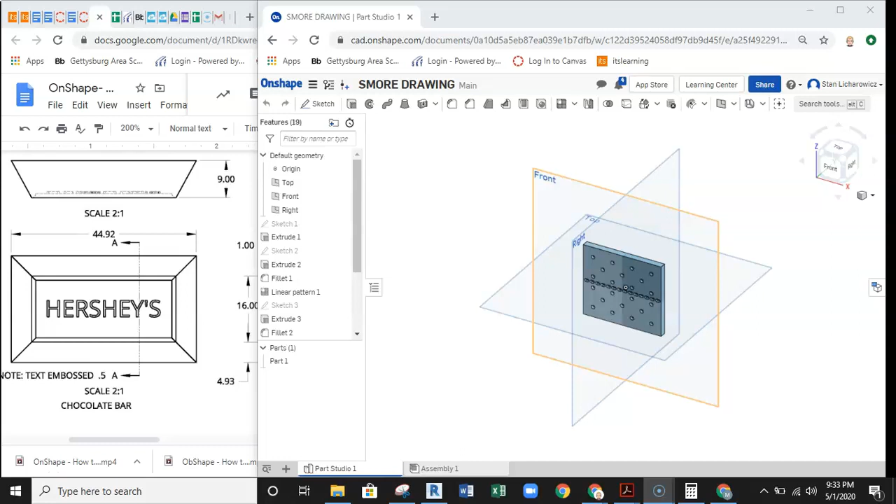This video is going to be sort of part two of the s'more working drawing file we're working on, and we're going to go ahead and model this Hershey bar here today, this chocolate bar. We'll go ahead and start by setting up a new sketch plane that will become a new part in the OnShape s'more drawing file.

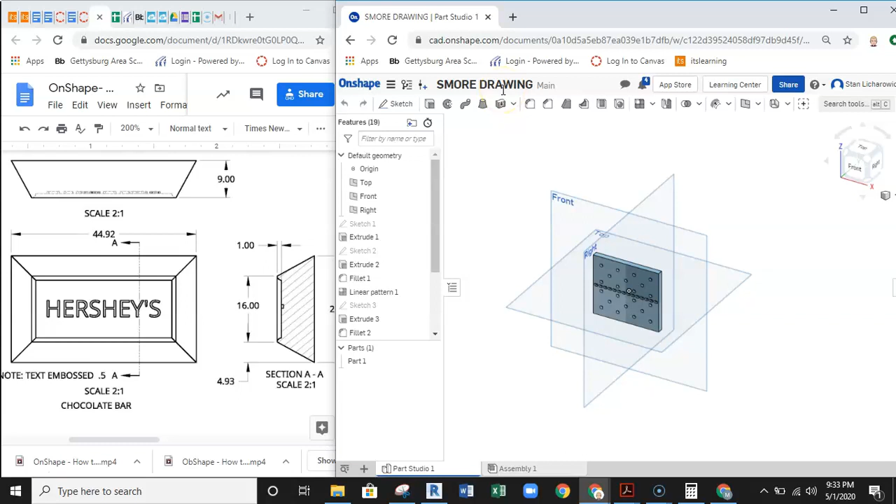So what we'll do is grab our sketch tool. It really doesn't make a whole lot of difference what window or plane we work in, but I do want to set this up so it's logical to me. So with the top plane selected, we're going to take a look at this.

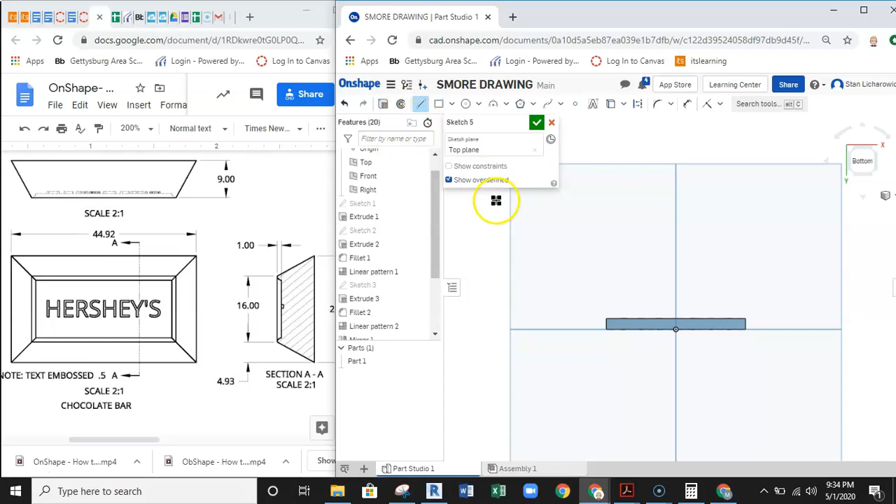Going to go ahead and grab some sketch geometry, grab my line tool, and sketch this in. Let me scoot this window a little bit so you can see, push this over. I'm going to sketch in this right side section view profile, and I'm not going to get the profile of this indentation yet - we'll do that later with an extrusion. I just really want to work out the profile of this entire part.

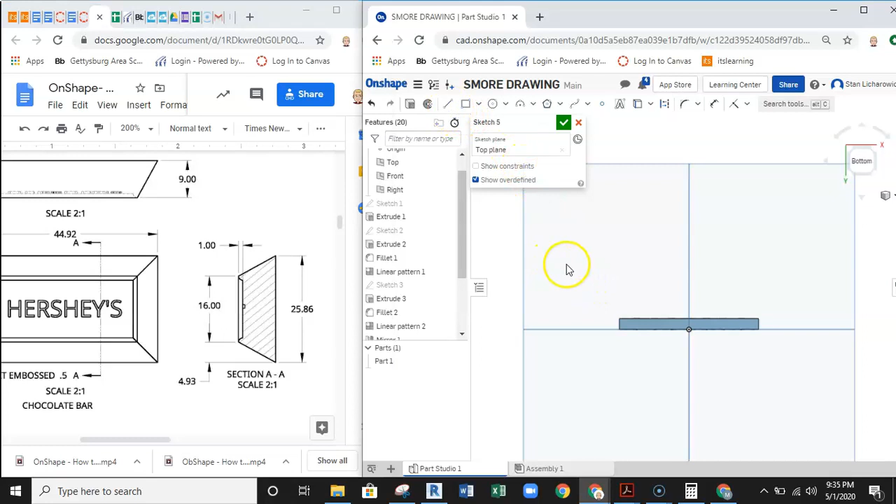I'm going to use the dimensions given in the top view for the extrusion information and the depth information. So we're going to grab my line tool and just sketch in a line. I've really gotten used to trying to sketch things in first and then start dimensioning them for size.

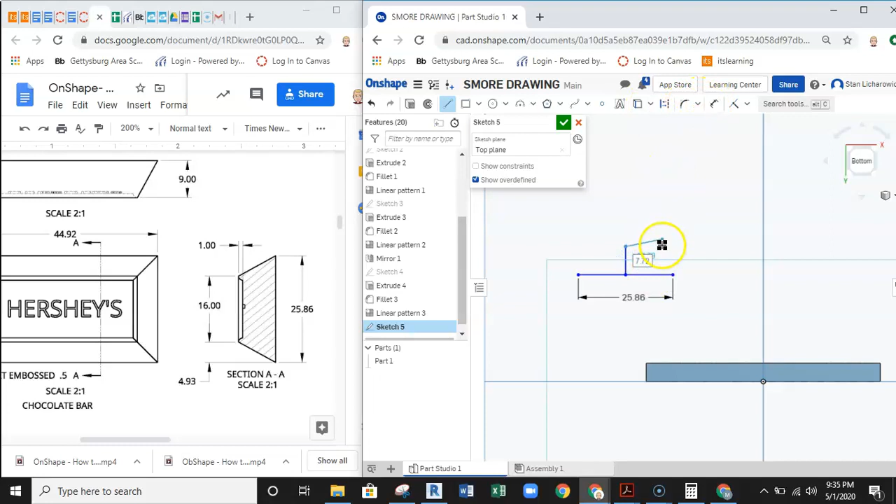25.86, that's the size of the line. Then I'm going to set this up in my height - so from center, I'll come up, drop my line in position. Because what I want to do is set up the height of this part, which is going to be 9, and now I want to start setting up the right and left sides. So if this is 16, the whole part at the top, I'm going to set this up as 8, and I'll do the other side as well.

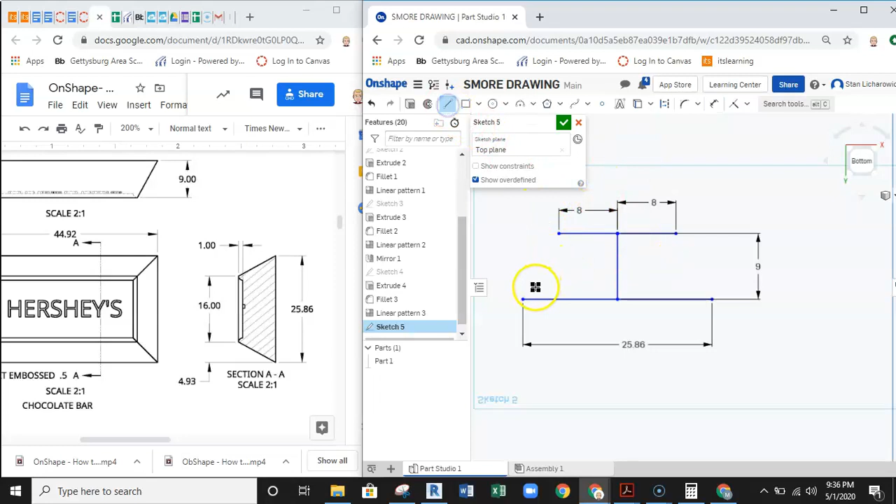Now, because it's not a very complicated part, and I know I'm most likely not going to come back and change this, I'm not going to worry about setting up center marks and symmetrical relationships. I'm really just going to start connecting some points here to get this roughed out as quickly as possible. So given that, I don't need that center line, I can delete it, and now I'm ready to extrude. So those were the dimensions that were given, that's what I'm going to work with.

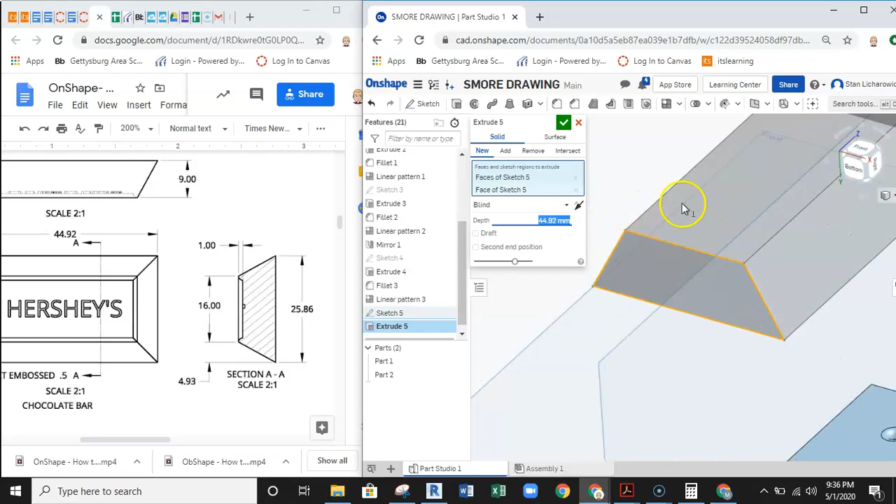I'm going to go ahead and extrude this thing, and that's going to be the 44.92. So we'll put that in, 44.92, and now we're running in the right direction. So we still need to now go ahead and set up some angles on the end, but we're going to work with the chamfer tool to make that happen.

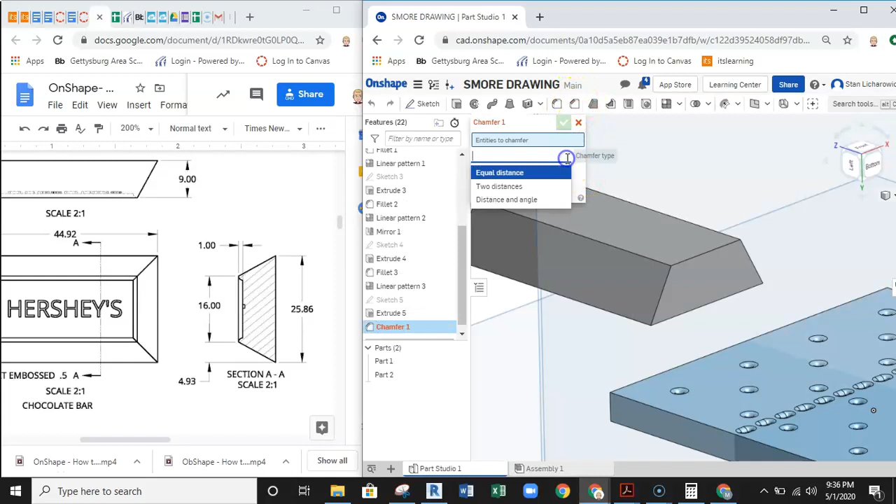So we'll use the chamfer to go ahead and push those angles in. Come up here, grab the chamfer tool off the bar at the top, and looking at this pull down, we've got equal distance, two distances, distance, and an angle. Well, I do not see any angle information on here.

I do see some distance information as 9 and also 4.93. I could probably also just use some math where I take the 25.86 minus 16 divided by 2, which gives me that distance also. So we're going to go with two distances - we'll call this distance 9, and then we're going to call this 4.93.

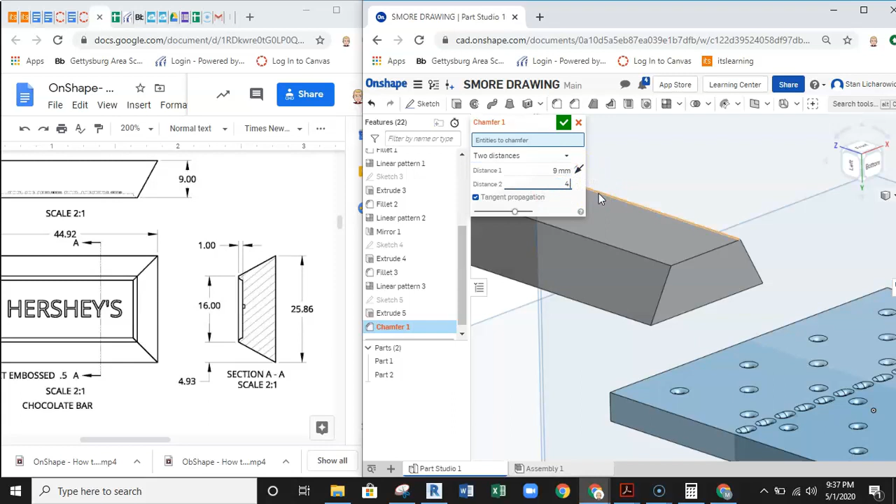Now I'm going to select this edge as the edge it's going to start functioning off of, and that looks like it's going to do something to what I'm expecting. So I'll go ahead and grab the other side. That goes ahead and chamfers in my chocolate bar on the sides. So green check that, and we're then going to say, all right, we're good.

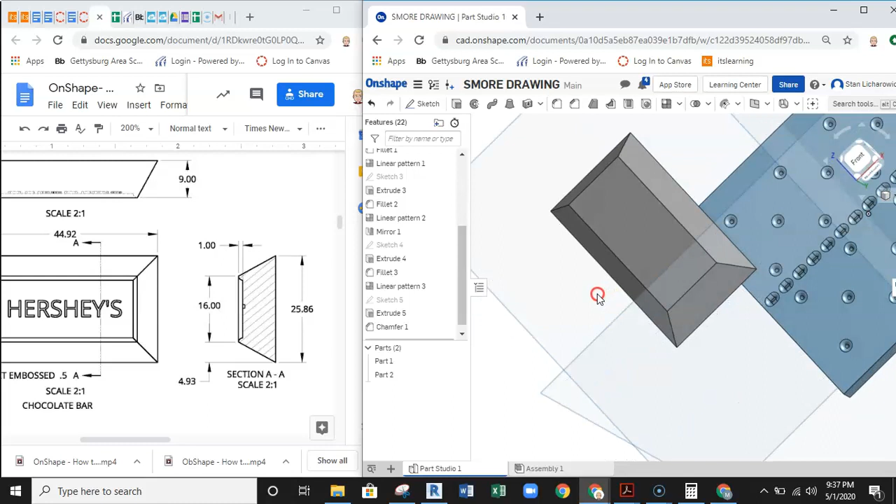Now let's start putting some detail work on the top. Go ahead and set that detail work up. I'm going to grab my sketch tool, drop that on the front face, and turn this. I'm looking at it from the view that I'm looking to replicate. So now, a few different ways we could do this.

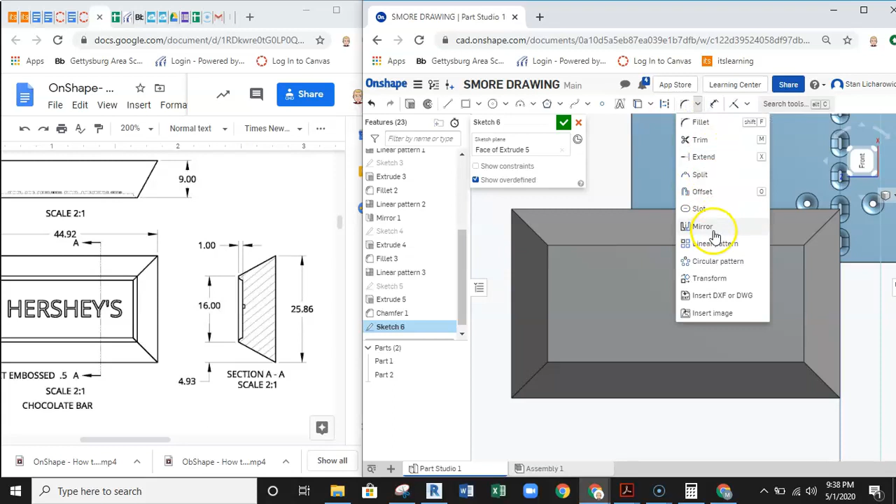We could use the offset tool to offset this in, or we could set up a rectangle and then center the rectangle. Probably multiple ways to do this. Let's see if I can find that offset tool. There it is. If I grab it and start working my way around here, I can offset just one line and pull in, but then I'd have to offset all these lines and start trimming. Yeah, I'm not really liking that idea.

It's too much work. If I sit over top of the face, I should be able to select, there's what I want. I want to be able to do an offset where I can just tell this thing one distance and it pulls that in for me for the entire rectangle.

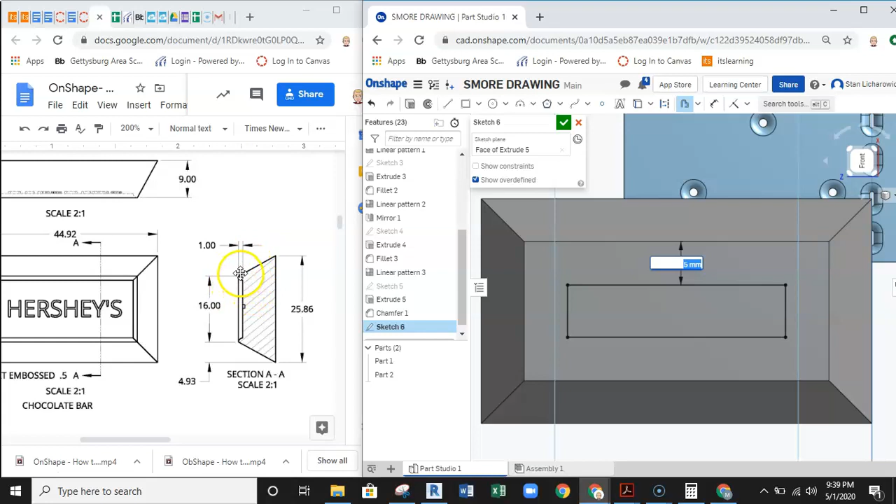So knowing this information, I can look at this and see we've got 16 here. The depth here is 1, so that radius of this arc is also going to be 1. If I put in 1 millimeter, that looks like it's going to probably work out just fine. And then we're going to go ahead and do an extrusion in here.

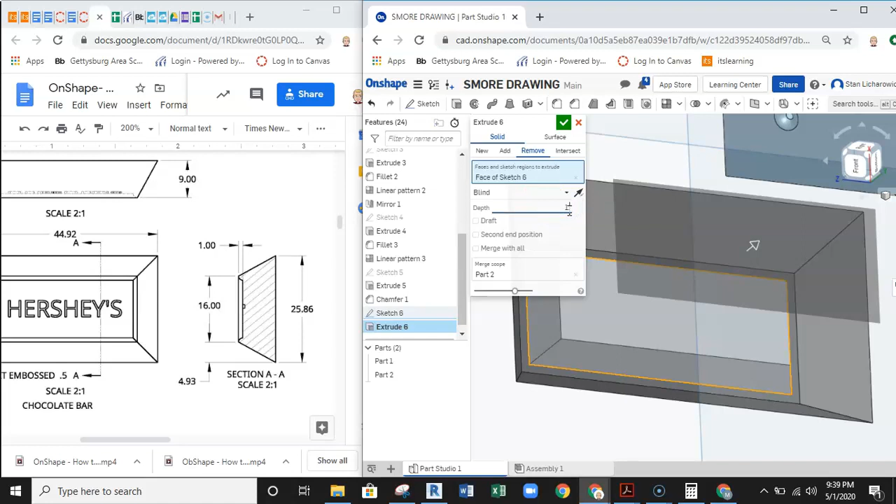Now I don't want to add material, I want to take away material, so I'm going to hit remove, but I certainly don't want to go that deep. So again, there's that 1 millimeter. We'll take that 1 millimeter and tell it that's what we're going to do. And that looks pretty good for the indentation on my chocolate bar.

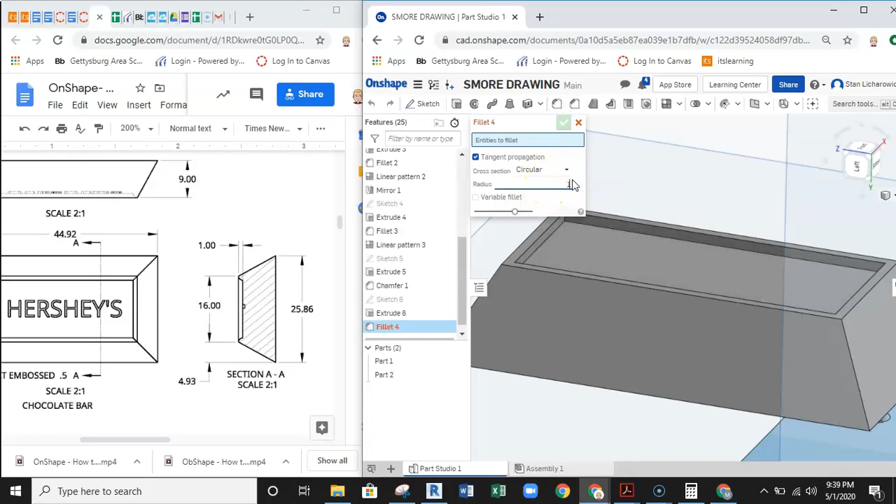Now I need to fillet over this inside edge. So to do that, I'm going to come back here, grab the fillet tool, set up that 1 millimeter radius, and start working my way around here. And I can see that this is going to do exactly what I was hoping it was going to do.

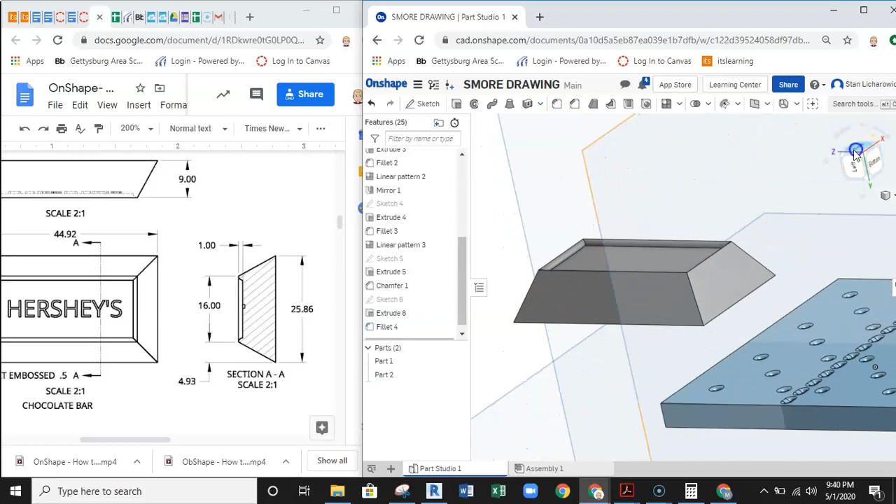Let me zoom in here on the corner and you can see what's going to happen. It's going to just fillet that into a perfect round corner. So that's great, that's what I'm looking for. Green check on that, and then we'll run back up here to the front face.

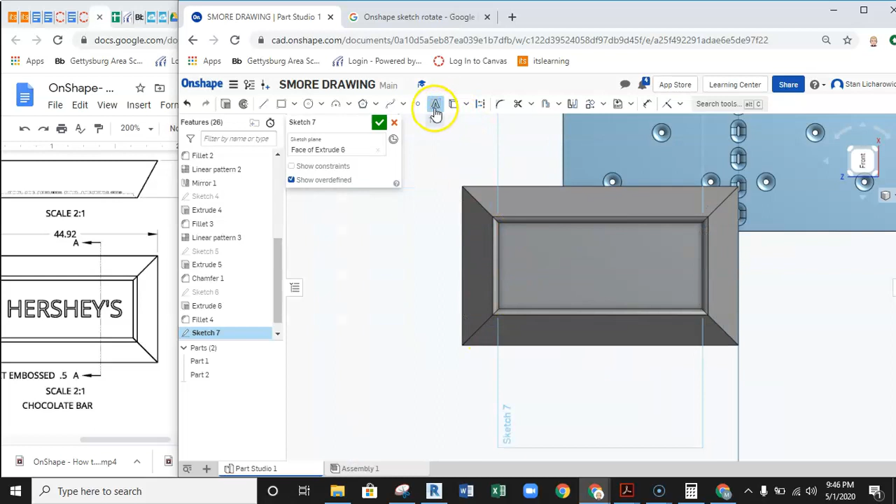Now we're ready to start putting on some text and then embossing that text. We're going to start a sketch, drop that sketch on the face of the chocolate bar, and grab that text tool right here - it says text if you sit over top of it. I'm going to pull a small window in here for the text, and we'll type in Hershey's. Oops, there we go. And we'll hit the green check.

Oh wow, okay, so what's happening is it's running in the same direction as the front view is positioned. Not a big deal. What we've got to do is rotate it and change the size, but we'd have to change the size anyway. So to rotate something, just make sure it's highlighted - we'll go ahead and highlight all that text.

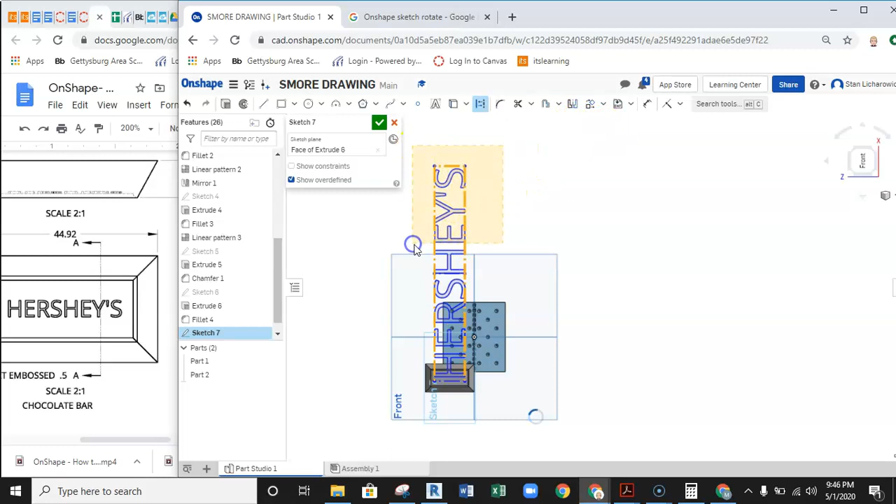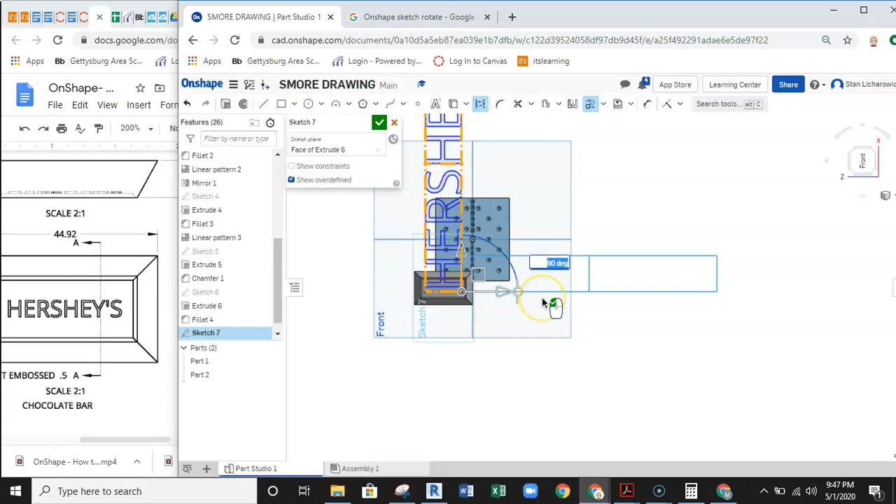Then we're going to grab this tool - linear, circular, but transform is what's going to allow us to do our rotation. Once you hit that transform button, you get this little arrow glyph, little square. What I want is this little airplane looking thing with our little arc on it. Once I grab that, I can click and pull this down to 90 degrees, or I could type in 90 degrees and then left click. So that puts it in position.

I'm going to also go right ahead since it's now here, it's highlighted. I'm going to set up my height, which I'm just going to make 4 millimeters because I'm thinking 4 millimeters is going to work.

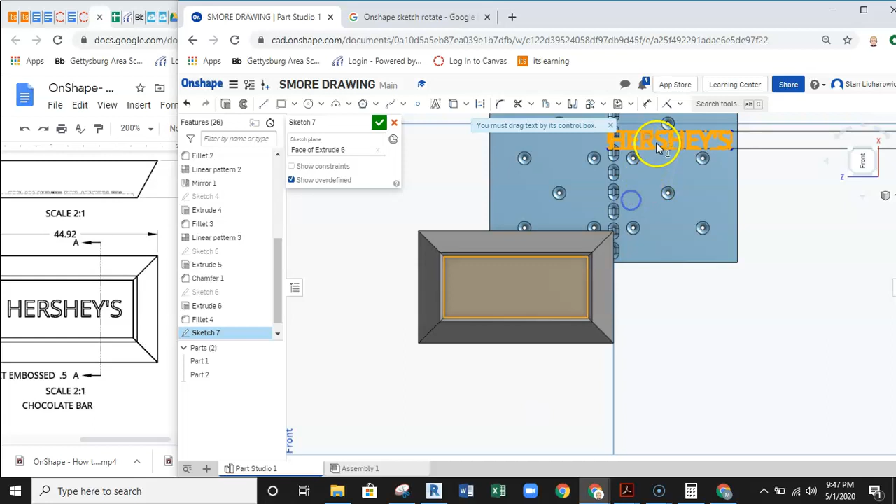I don't think there's a height given in the drawing, but it needs to be proportional to the Hershey bar. When you select it, grab the text by one of the corner grips, not just the middle. There's no dimensional information on positioning, so this is completely set up for aesthetics.

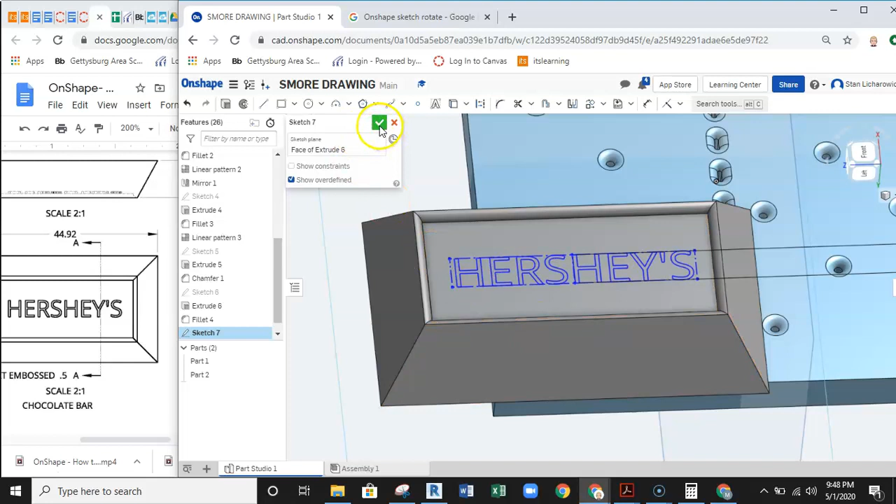Once it's in position, hit the green check to finish the sketch, grab the extrude tool, zoom in, and select it. Make sure Hershey's is all highlighted since I don't want to do each one separately. I'm not going to emboss this out - embossing is in, so we're going to remove material there, so it goes in.

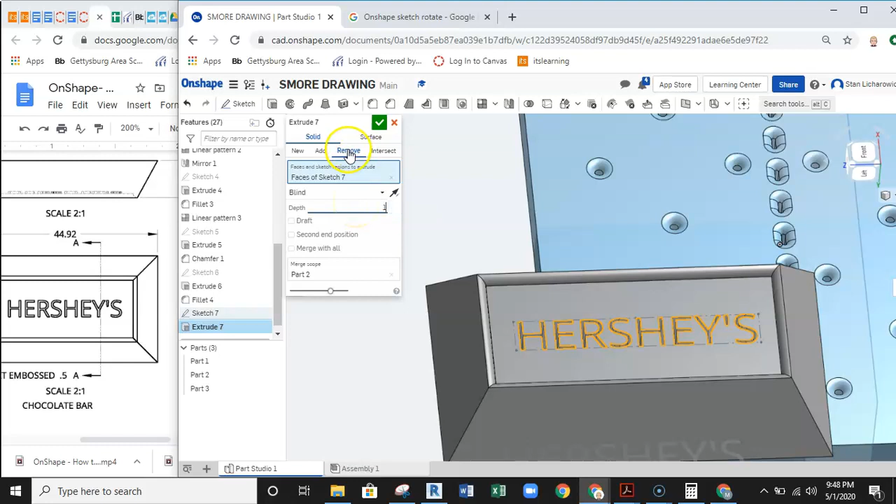Wait a minute, what's it say here on the drawing? It says the text is embossed, right here, and 0.5 is what we're working with. So back in Onshape, 0.5 is my embossing depth. Hit enter, then the green check, and now I have an embossed Hershey's chocolate bar.

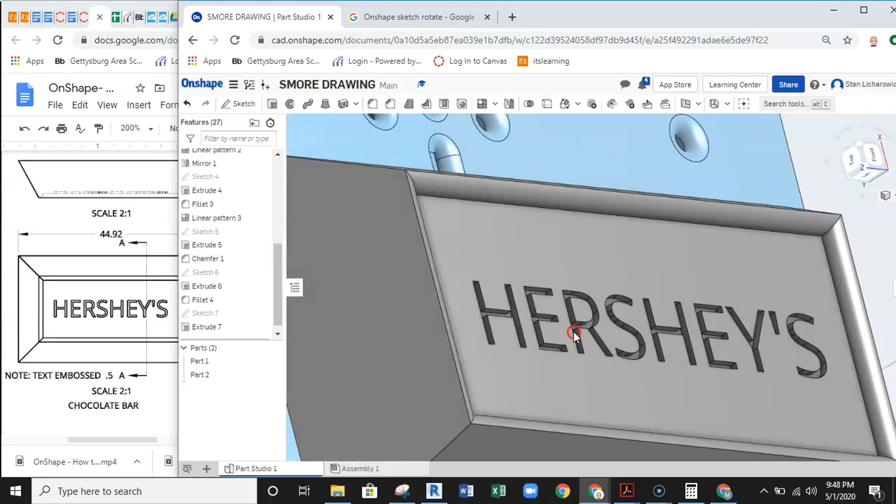That is all set and ready to get laid out onto my sheet and ready for my assembly.

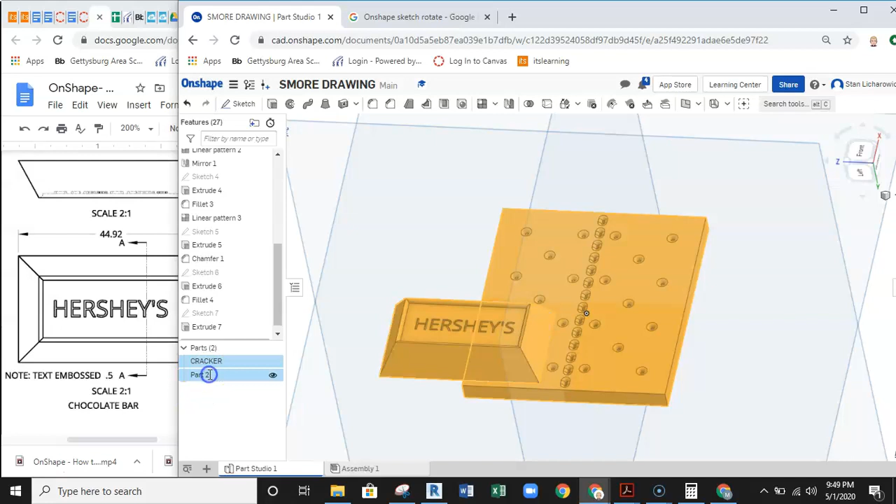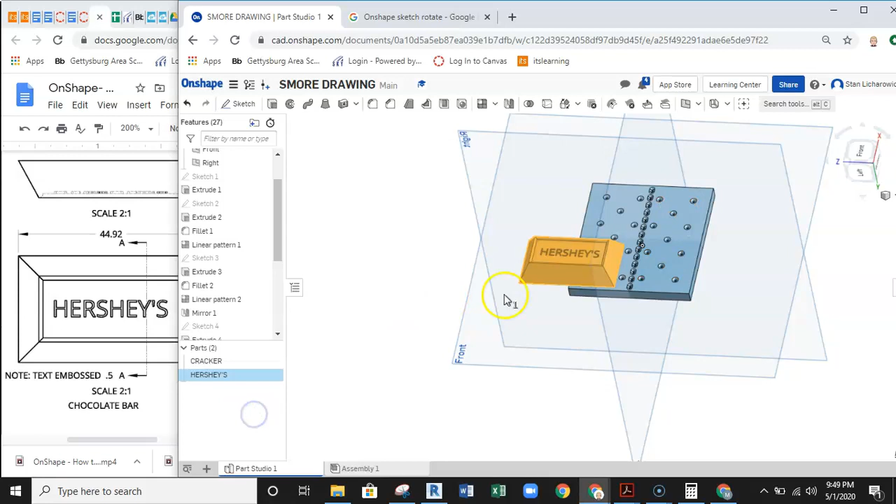The last thing I want to do is start renaming some parts. Part 1, part 2 is going to get confusing, so I'll select part 1, right click, rename, and call this cracker, so I know it's a graham cracker. Then part 2, right click and rename, and we'll call this Hershey's. So now I have my graham cracker and my Hershey's.

Now I'm ready to go ahead and start my next object in this assembly, which is going to be the marshmallow.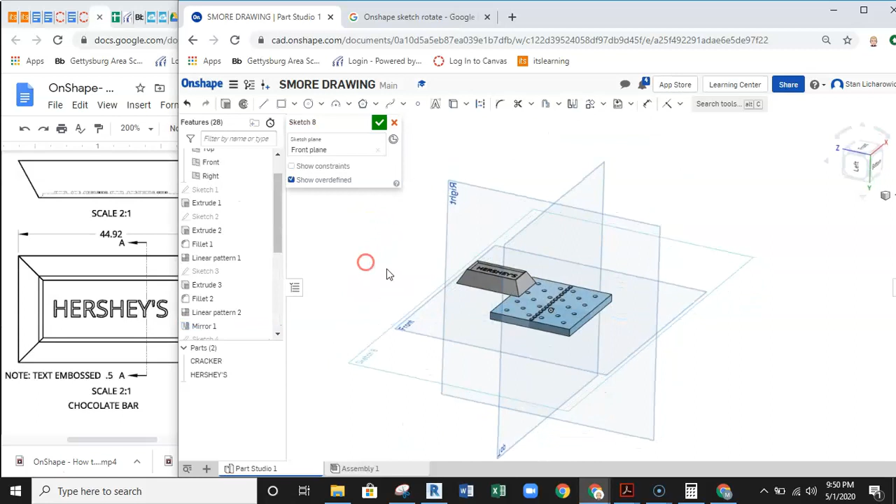To start that marshmallow, I'll grab my sketch tool and grab a plane - probably the front plane, yep, that's selected. I'll go to that front plane, grab my circle tool, and now I need to find some dimensional information on this thing. It's fairly simple looking though - it's 30 millimeters by 30 millimeters, and it's got a fillet on the edge.

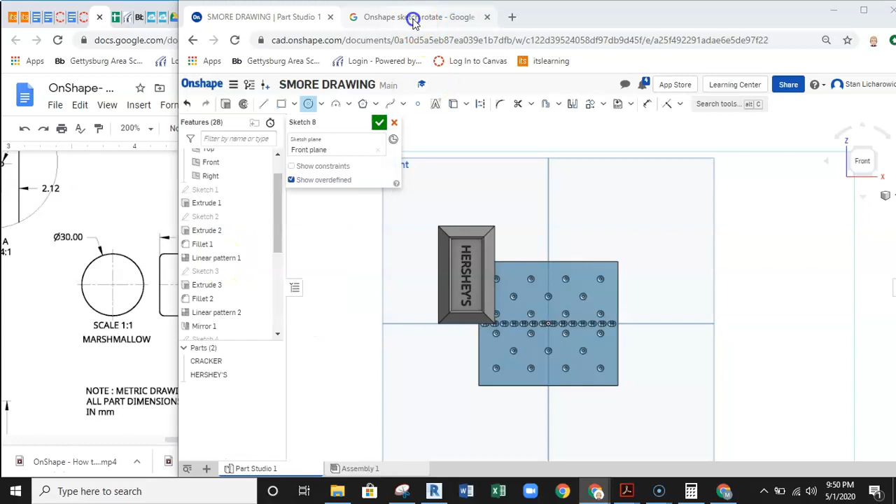There's no dimension given for the fillet, but we'll probably just give it a 1 or 2 dimension fillet. So we'll pull out a circle here and grab this as 30 millimeters. Finish that sketch, grab the extrude tool, and extrude this out 30 millimeters.

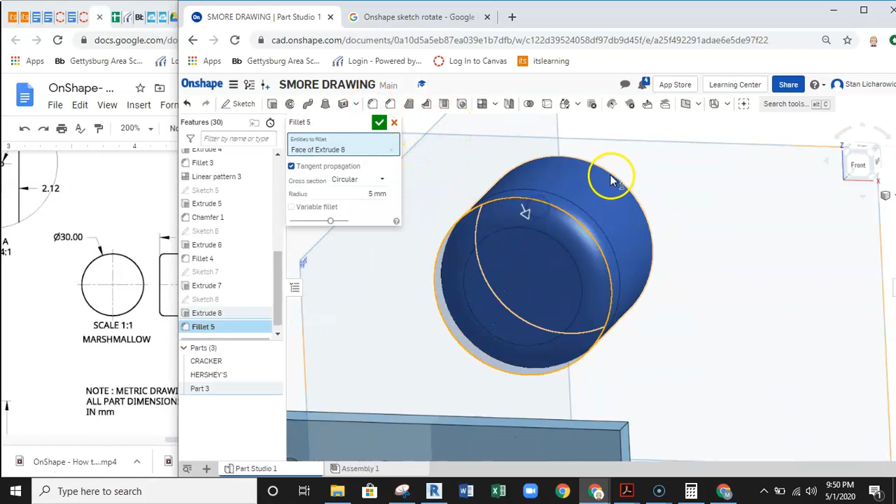Let's grab that fillet tool and set this up. Now 5 definitely looks like too much - let's hit 1 and see what that does. Yeah, 1's fine, I mean this is a marshmallow. Let's try 2 - yeah, 2 looks fine too. Either way, it's a marshmallow, we're going to run with it.

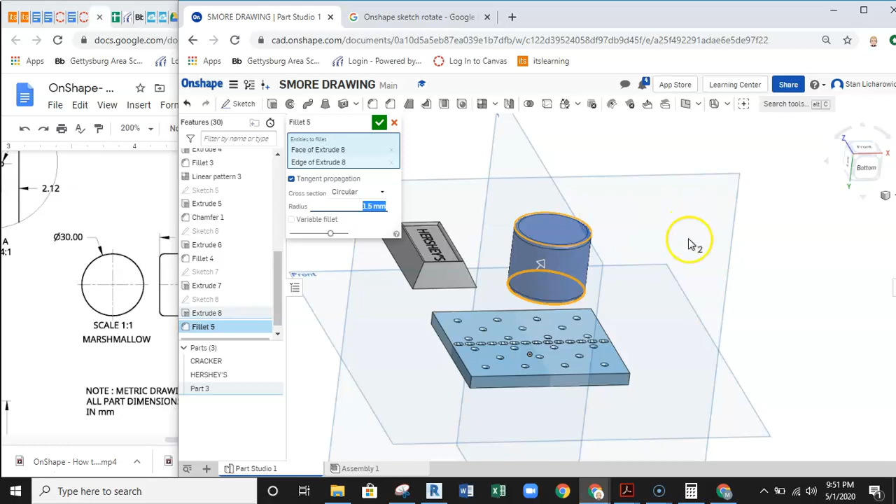So at 30 millimeters, that's your diameter, and then we have a fillet. We'll maybe take this back to 1.5. I love how they both update at the same time. Green check, that's all set and ready to go.

Now I'm almost ready - yeah, I'm ready to start building an assembly.

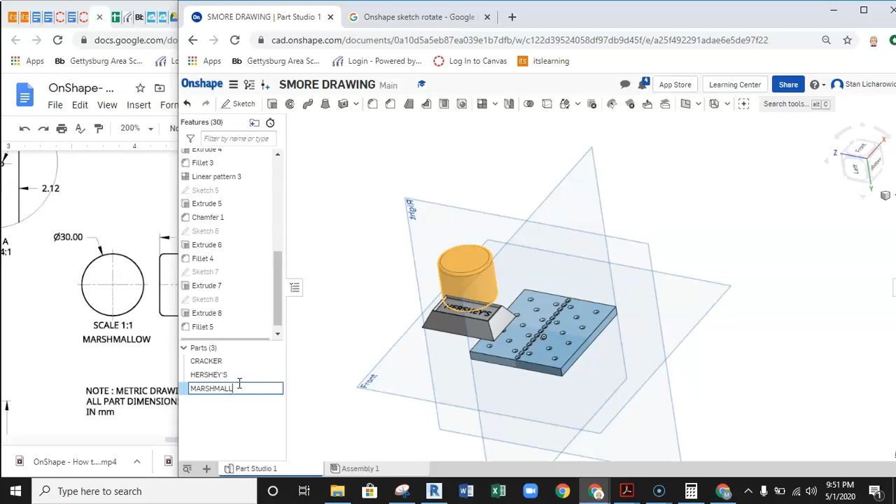Before I start building the assembly, I'll right click on that part 3 and rename this thing Marshmallow. There's my marshmallow, all right.

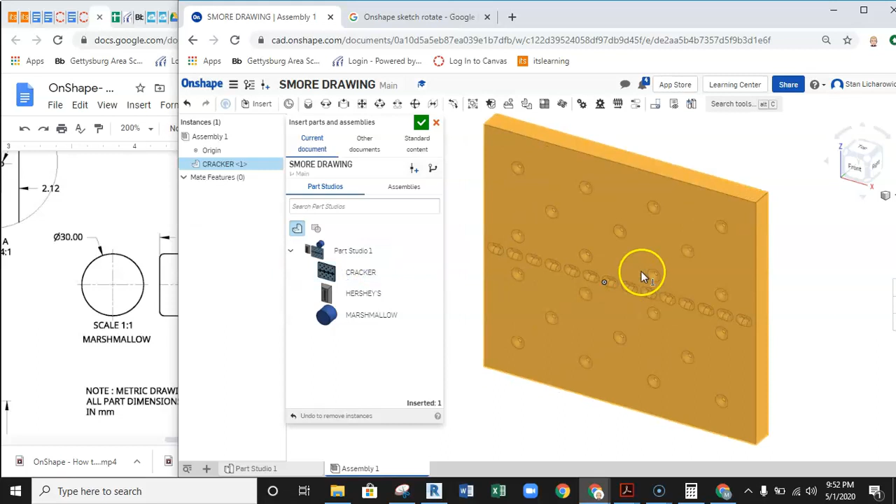To start building the assembly, we'll hit this assembly button at the bottom of the screen, and we just need to start putting parts in, very similar to any other solid modeling software. Hit the insert button at the top, come down, and first I'll want a cracker, so we'll drop the cracker in position. Then I want a Hershey's bar, drop that in position, and then a marshmallow - pull that in and drop it in position.

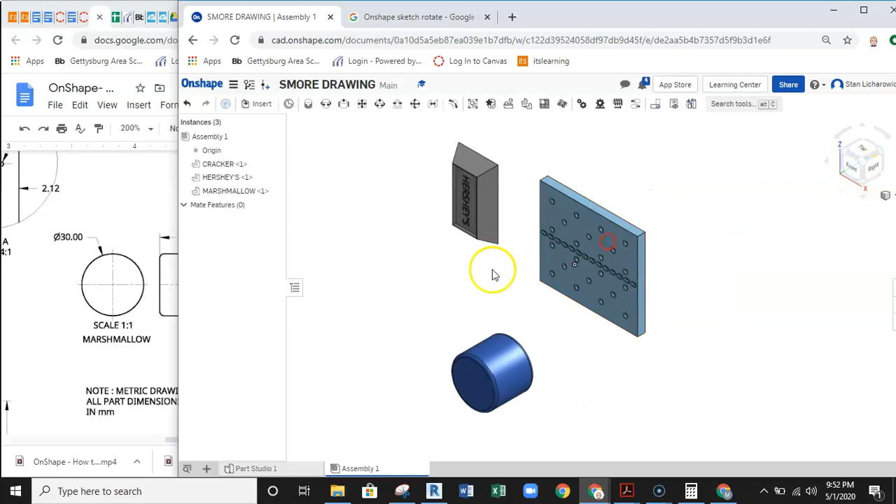Now I'm going to display this as an isometric view. One of the first things I'll do is go in and set this up as an isometric. But that's not the isometric view I want. If I go back and look at the drawing, I can see, okay, that's the isometric view I want.

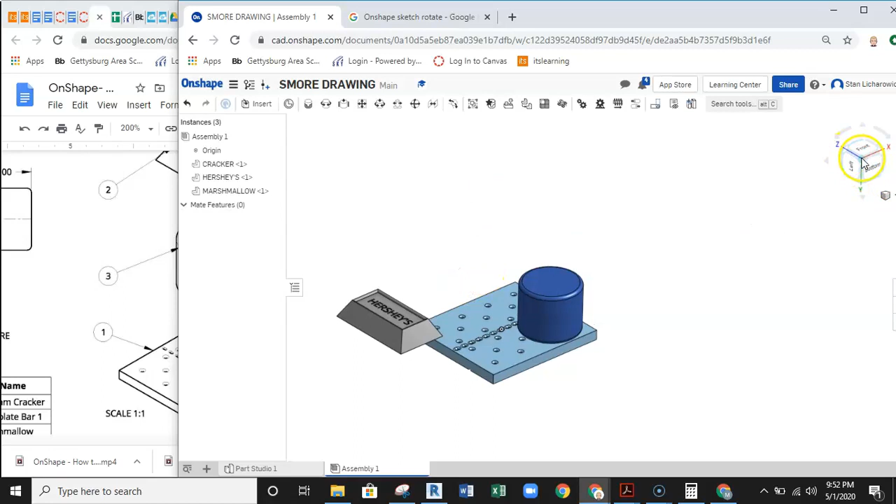Come back over here to OnShape. I want that isometric view where this sits like this, and my marshmallow is stacked on top with a Hershey bar here. When I hit this corner cube, it moves to a different isometric view.

If I go to this, it keeps pulling to these different isometric views, not the view I'm looking for. That's probably because when I started this drawing, I wasn't pulling and setting up the right planes. So it's not a huge deal.

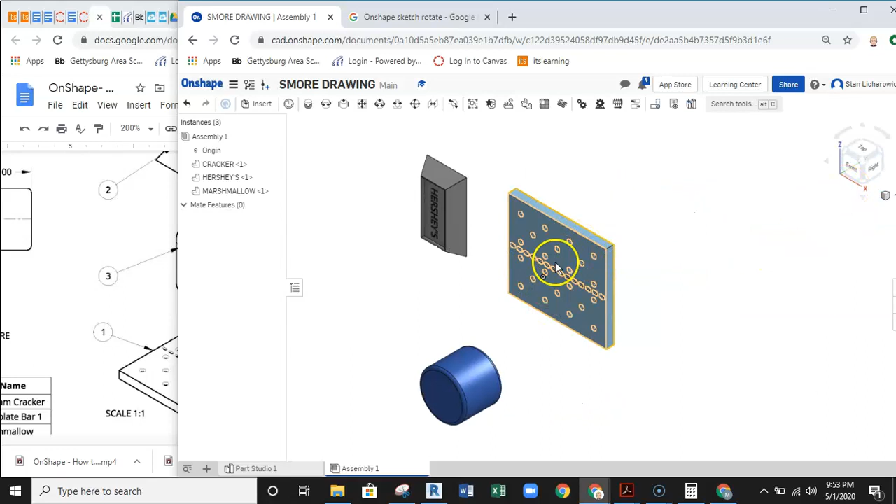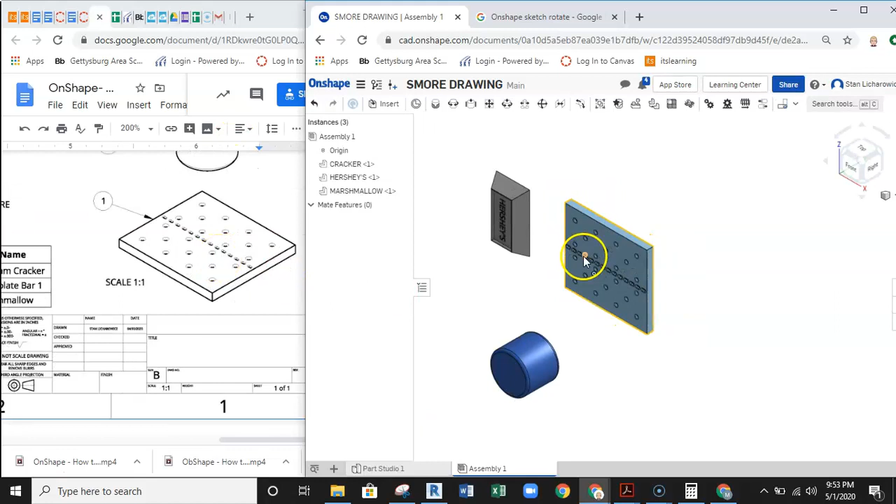What's going to happen is I'll go back to my cracker and change that view. When I go back to my isometric, I want this cracker flipped down, so the bottom of it is on my bottom plane. Then when I come back into my assembly view, this is flipped down so my isometric view is set correctly. Think about what you're trying to show in the drawing and how you want to set this up so it previews properly.

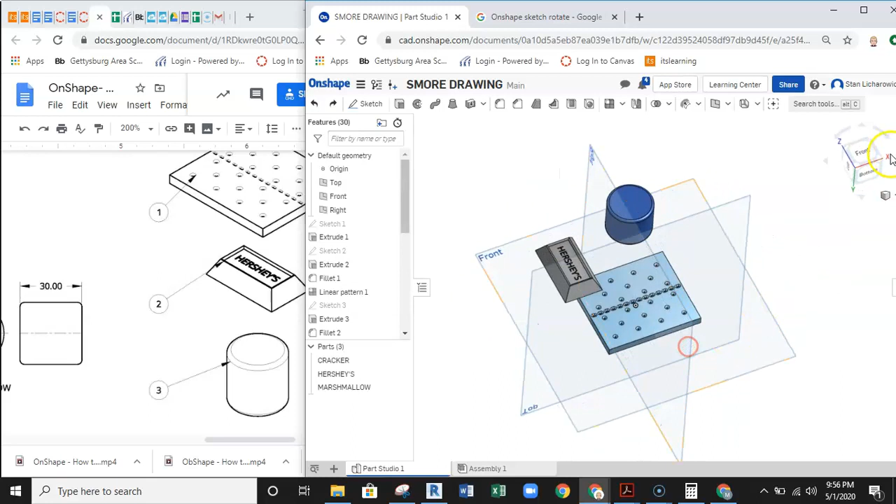So head back to the Part Studio. From the assembly file, come back here to Part Studio 1, and go back to the first part that you made. This is one of the things I really like about OnShape, everything updates through, and it's pretty neat to watch. So while I'm in this Part Studio area, I'll hit isometric. It does the same thing, goes to this funky view for me.

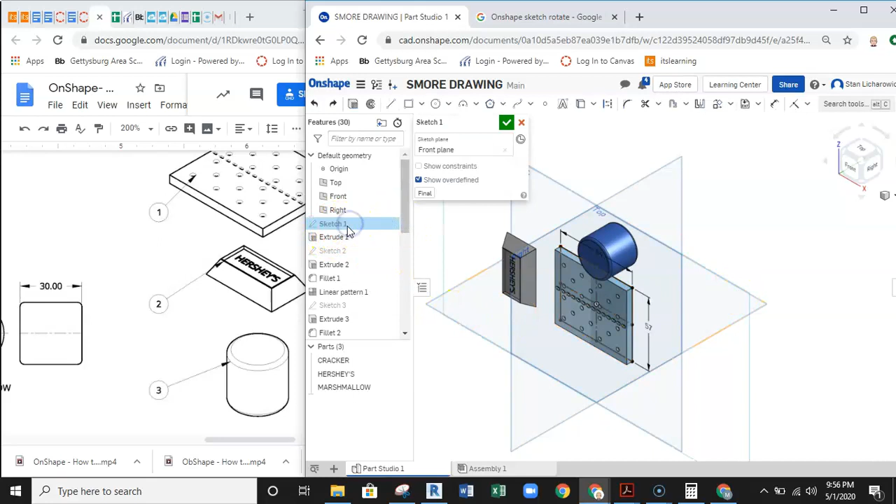I need to fix this graham cracker. The first sketch is justified on this top view. To do that, I'll slide back up here, find that first sketch, double click on it, and it says sketch plane front view or front plane. I'll select it and then click on the top plane. You can see the sketch turn and move. I'll hit the green check and it updates.

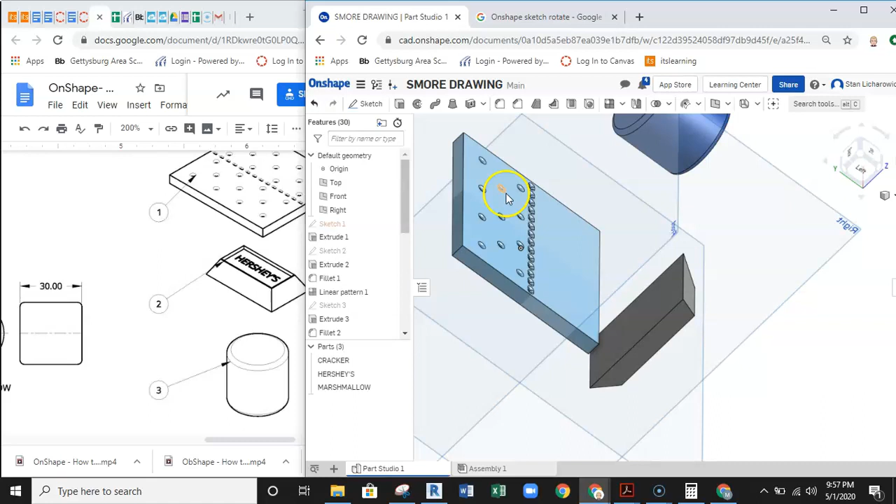Now what it also did, you can see I lost half of my array parts here. Not a big deal, because when I arrayed those, I used one of these planes since I have this set up on plane. I used a plane to mirror the parts, so it's not a big deal. I'll come looking down through here and find where that mirror is. There's the mirror — the issue is that it lost its mirror.

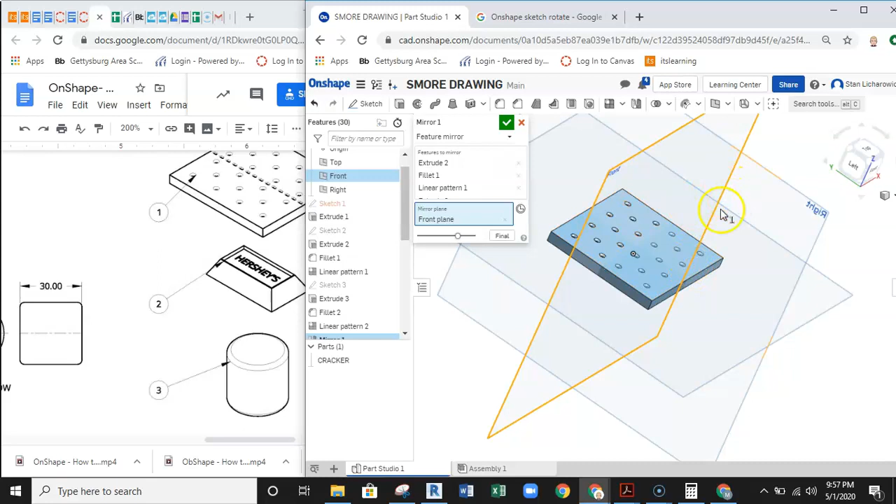So instead of using the mirror plane as top, I'll select here and say, how about you use front? So it uses front now and it updates. Hit the green check and now that's going to update through. One of the things I really like about OnShape is that it updates pretty nicely moving through.

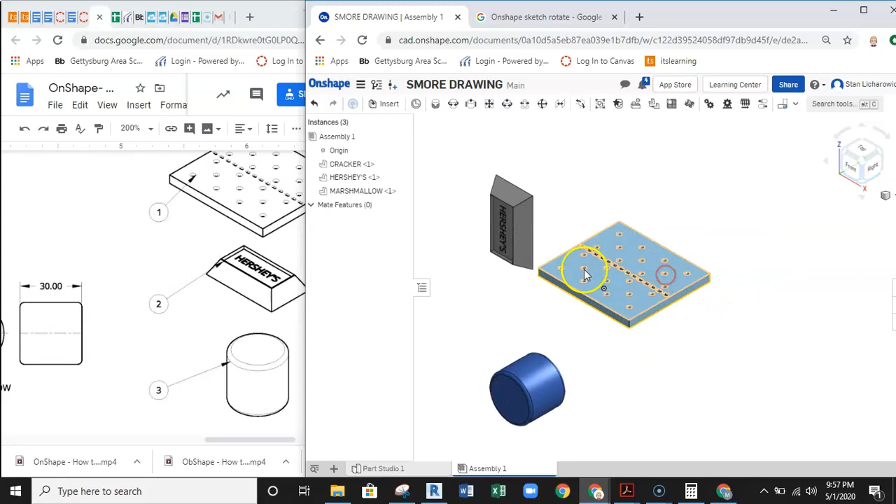Now I think we're ready to jump back into that assembly and hit that isometric view, and I can see, yep, you can look at this graham cracker over here. That graham cracker is now in the same orientation in both views. So we know the orientation's right.

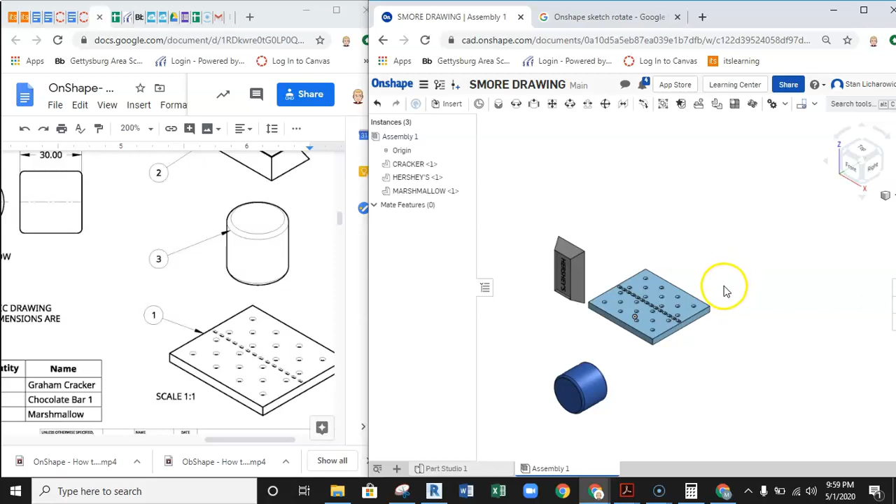What we'll do is break here. We'll come back to how to build the assembly in the next video, and then how to do the parts list, how to set this up, exploded view drawing, and how to lay this out in another video. So look back here for part 3.